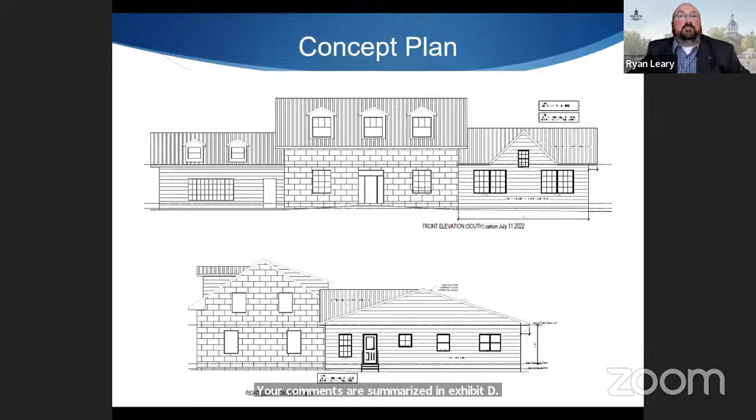This was also circulated to committee members. Your comments are summarized and attached in Exhibit D, and our analysis included a response to those committee members. Mr. Chair, next slide will be our recommendation, which includes a number of conditions, and I believe there's also a second slide with additional conditions. We're available for questions.

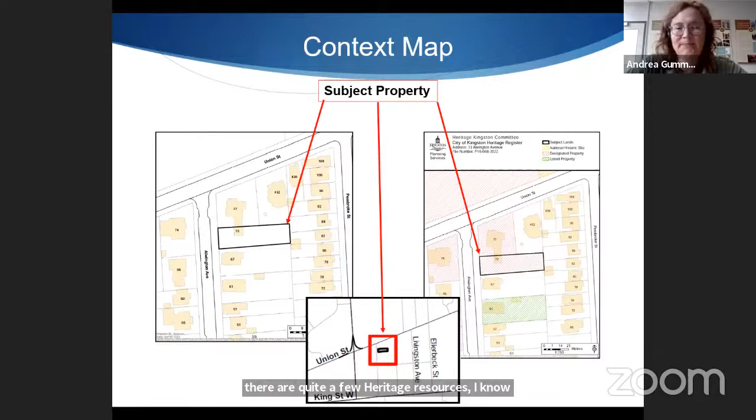So associated with the severance that happened in 2010, there was a need to update the understanding of the cultural heritage value of these properties. And so that was done. And essentially what it says is that the value remains essentially the same, but it has been somewhat lessened because the primary value of this coach house is its association with the principal dwelling at 77 Alwington. So by severing those two properties, that link is also somewhat severed.

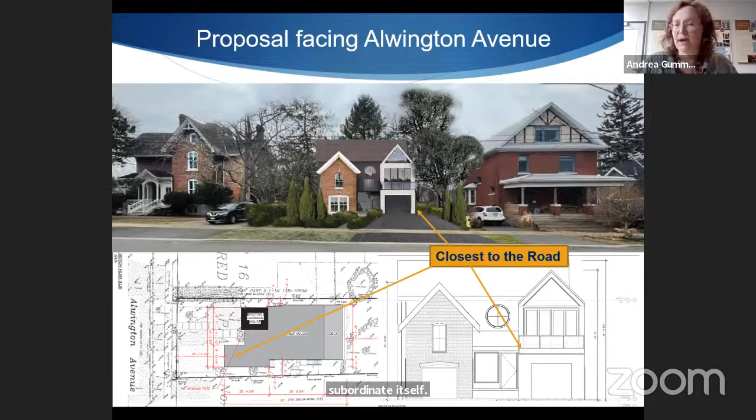Next slide, please. This shows all elevations of the proposal. I think this really helps to see how the garage portion is coming out a little bit. You can also see how the entryway portion between the coach house and the proposed new garage is recessed slightly, which is beneficial to help maintain the form of that coach house.

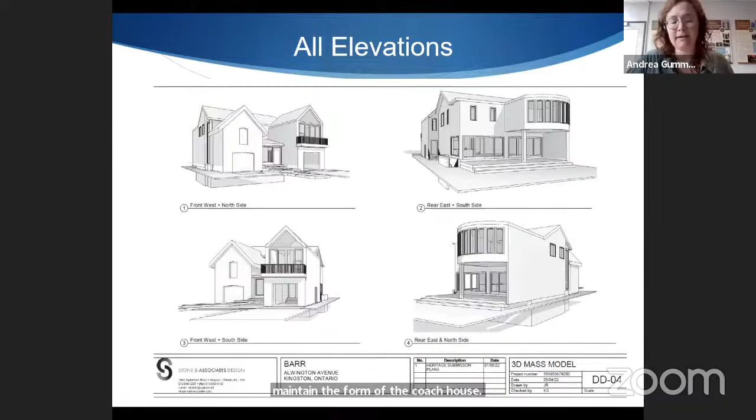Okay, next slide please. We have quite a few—here's our recommendation. We are recommending that this proposal be approved. Part of the proposal, of course, is rehabilitating the existing coach house.

Next slide, please. There are quite a few conditions here, 10 conditions. These conditions ensure that all of the heritage considerations are subject to a little bit of additional analysis by staff as they come in for further refinement of the proposal, but they do allow flexibility for the applicant to build what has been proposed. Essentially, our recommendations have acknowledged that we believe this proposal could be improved by making some adjustments, and these recommendations or conditions would also allow some of those adjustments to be made, but they also confirm that what has been proposed is acceptable. And that is the end of my presentation.

I'm happy to answer any questions. Thank you. Good, thank you very much, Andrea. So committee members, comments, questions? Don Taylor.

I think this is a rather challenging application, and I guess I'm also surprised that there's really overwhelming comments from members, from heritage planners, and from every set of heritage guidelines you can find, that the new garage wing should not be forward of the heritage building. To me, that's such a fundamental thing that I have serious problems with this application. My first question is, why did staff recommend approval against the comments of all the committee members and against the comments of the heritage planners and against the guidelines for heritage renovations?

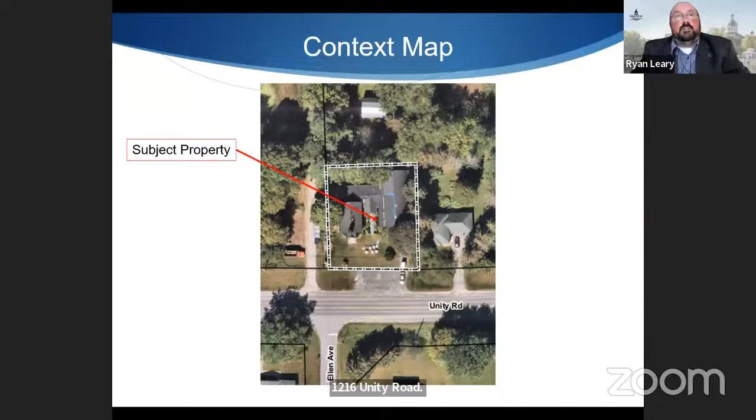So this property is at 1216 Unity Road. This is on the north side of Unity Road, east of Glen Burnie, in the rural part of Kingston.

The property is known as the former Glen Burnie Methodist Church. It contains an 1857 limestone former church building with a 1957 Sorensen-designed modernist addition, connected by a single-story link addition. The property was designated in 2020 under Part 4 of the Heritage Act. Relevant attributes include the one-story rectangular church structure, constructed of rough-faced limestone with a medium-pitch gable roof with simple brackets, and the modern rectangular structure with an arched roof located east of the church, built in 1957.

The single-story rear addition and link structure, which is the subject of the application today, sits primarily between the stone church and the modern structure and is not noted as a heritage attribute. The bylaw is included in your agenda package.

What we're looking at today is an application under Section 33 of the Act to request approval to alter a number of the existing exterior door and window openings on the link addition. This is the south elevation, which faces the road.

It contains a single steel door with narrow side lights flanked by large double casement windows and one smaller single casement window. It's proposed to have a large central four-panel glazing sliding door or French doors, flanked by reinstallation of the existing double casement windows.

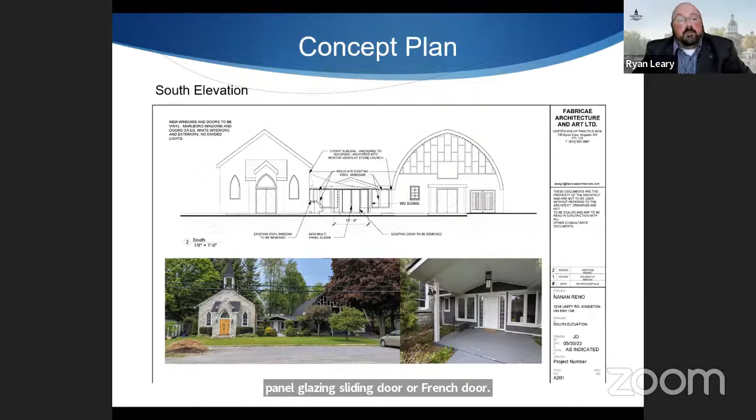The west wall, which we're looking at here, is the west elevation, tucked in behind the stone church, as you can see in the bottom right.

It currently contains a two-panel sliding door and a single sash window. The proposal is for a sliding patio door to be reinstalled in a new, more central opening, with the existing window on the right to remain. A second window is proposed on the opposite side of the door, which will be a horizontal sliding window.

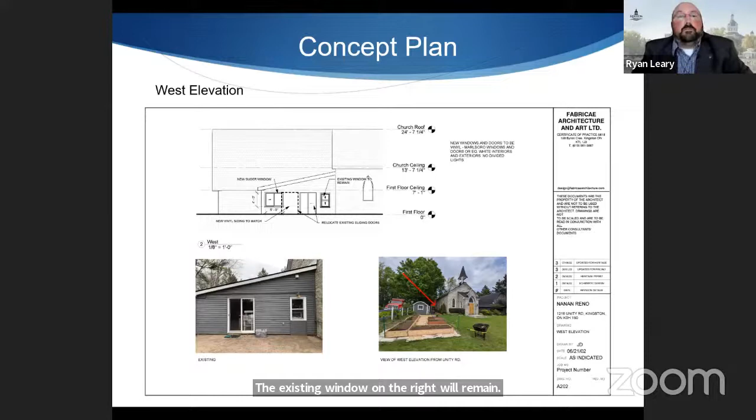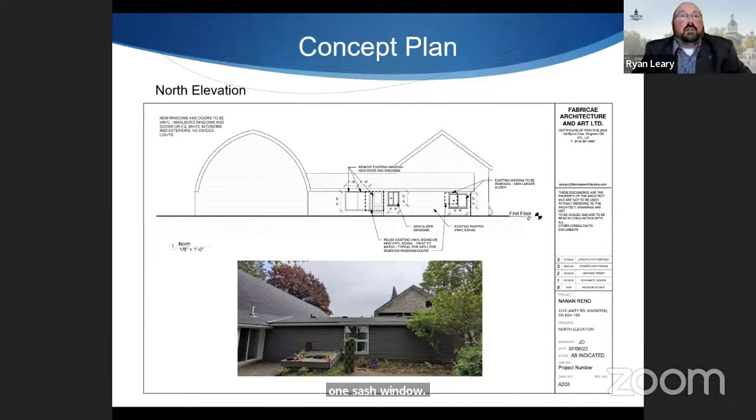This is the north elevation, the back of the building, which currently contains one three-part window and one sash window. A new central partially glazed door is proposed with two horizontal sliding windows on one side and a double fixed window on the other side.

This is a view from above, a floor plan, sort of site plan drawing. The owners wish to finally install anchors for a seasonal sun sail, a canvas covering.

It's going to be a gray-beige color, to be installed above the southern courtyard, the one in the middle of the screen on the south face of the building looking at Unity Road.

The deck and patio is to be improved, making the deck approximately 1 meter wider and 3.5 meters longer than the existing covered porch currently. The covered portion of the porch is not to be changed. The detailed plans were prepared by Jennifer Demeter for Fabricae Architecture and Art Limited, with a cover letter and photographs prepared by the owners, all attached in their application.

In terms of our review, the subject application includes a series of alterations to this later one-story link and rear additions located between the stone church building and the modernist church hall addition, which are attributes of the property. The link addition was built sometime in the mid to late 20th century and is not noted as an attribute. However, alterations to these types of features could have a negative impact on the overall character and attributes of the property.

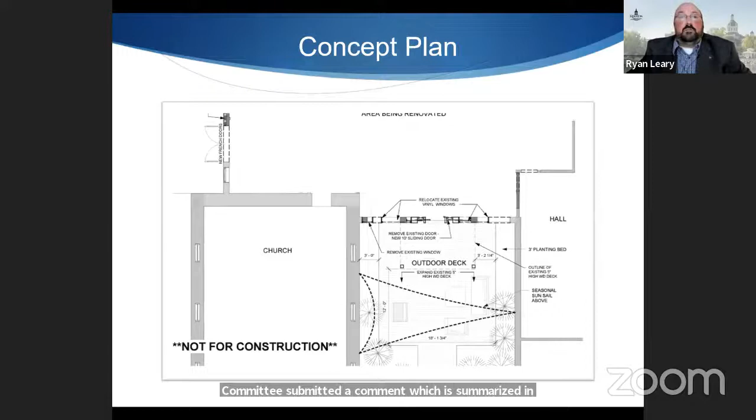So this application was circulated. Building noted that a permit is required, and that separate review will be underway for a lot of the interior renovations that go along with these exterior changes. Committees submitted their comments, which we've summarized in Exhibit D of this agenda, and no significant comments were expressed by committee members.

So our last slide should be the recommendation, and I believe that's the entire motion in front of you, Mr. Chair, and we're available for comments, questions. Thanks. Thank you very much.

I finally worked out what you mean by 3 entrances to the church. It suddenly dawned on me that you count that. Okay, committee, questions, comments, thoughts?

Aha, we've worn you out. Am I right in seeing nobody at all? Tell me if I am wrong. Members of the public, including Jennifer, any comments? And again, seeing none, I believe, Madam Clerk, are we still without members of the public? That is correct, Mr. Chair. Yeah, who you see on your screen is in the meeting. Okay, thank you.

So go on to a motion. Do we have somebody willing to move the printed motion, which is 1 paragraph long with 5 conditions? Looking for a mover, and I see Jane McFarlane. Looking for a seconder, and I see Don Taylor. Further discussion on the motion as printed? Seeing none then. Oh, sorry, Don Taylor.

I think this is quite acceptable. The proposed changes really have no impact at all on the heritage attributes of this property, and so I think that's fine. Normally, we don't feel very good about vinyl products, but these are alterations to a building that is part of the structure that is mostly vinyl, and so one might as well carry on with that. So I don't think the committee should have any problems with this. I certainly don't. Thank you.

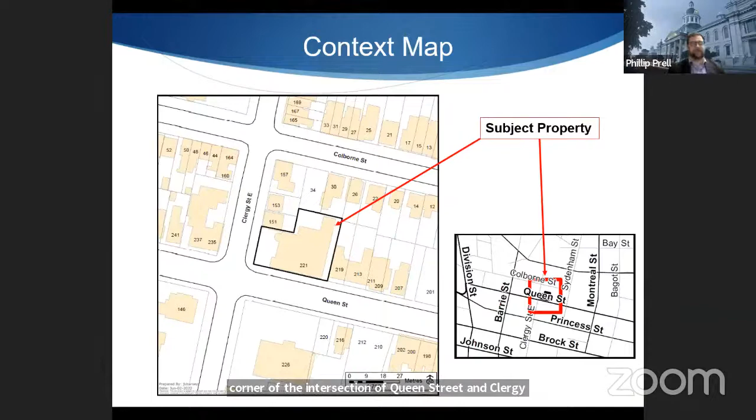221 Queen Street is located on the northeastern corner of the intersection of Queen and Clergy Street East and is kitty corner to St. Andrew's Presbyterian Church, as you can see in the pictures above. Next slide, please. The property is a 3-story limestone Gothic style church with a 5-story bell tower. At this point, I wanted to note that the applicant or the business owner in this case has already installed both signs. Next slide, please.

The property is designated under Part 5 of the Ontario Heritage Act and has the following entry: This 1920 church replaced an 1886 building destroyed by fire. This pyramid roof tower at the corner, large Gothic window to the south, and series of Gothic arches to the west are important features of this limestone church.

Next slide, please. So first I will review the signage at the intersection, but the following comments will also apply to the sign facing Colborne Street, which will be covered in the next slide. This building has maintained its historic exterior throughout a couple changes and internal use changes, and this proposal intends to continue this trend while increasing the visibility and legibility of a new hotel/apartment use.

The increased visibility of both secondary entrances, along Queen Street and on Colborne Street, which you'll see in a moment, resulting from the new signage, should not negatively impact the prominence of the main entrance that faces Clergy Street East, as that entrance has a...

Very prominent staircase, decorative fenestration, and a grand wooden door, or pair of doors. The new signage is required to have been anchored to the building in accordance with the city's masonry policy for reversibility and preservation purposes. This is a condition of approval. Further, the size and design of these signs are appropriate for the building and subtly support users' wayfinding.

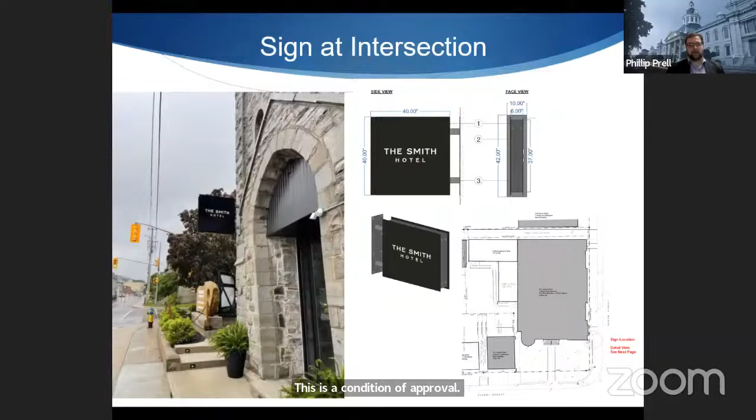Similar to the signage facing the intersection, this sign facing Colborne Street should not negatively impact the prominence of the main entrance that faces Clergy Street, while increasing the legibility of the commercial use. This sign should also have followed the city's masonry policy.

So here is the recommendation for the 2 signs. The one on the intersection will be larger than the one on Colborne Street, which makes sense because that one on the intersection is more of the main entrance.

And these are the recommendations. I wanted to highlight that the masonry policy should have been followed when attaching the signs and is a condition of approval. Thank you very much, everyone.

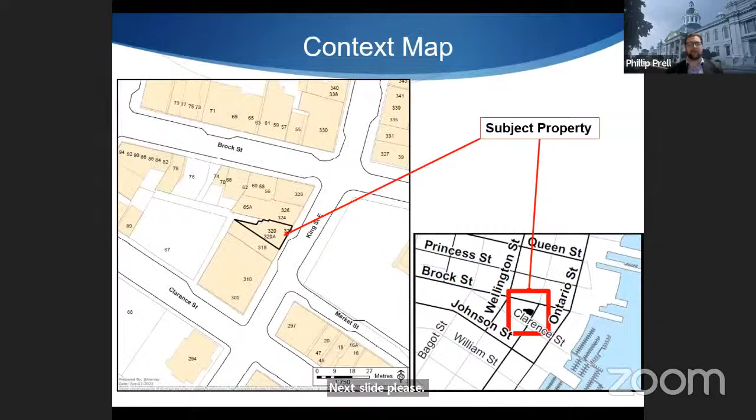320 King Street East is part of the Masonic buildings and is located mid-block between Brock and Clarence Street along the western boundary of the Market Square Heritage Conservation District, as you can see in the pictures above. Next slide please. 320 King Street is part of a 3-story Italianate-influenced brick building with arched window openings with buff-colored arches, which is characteristic of John Power. Next slide please.

The property is designated under Part 5 of the Ontario Heritage Act and has the following relevant attributes: the building is divided into 10 equal bays with regularly spaced segmental headed windows and horizontal stone banding, and has arched window openings with buff colored brick arches and quoined edge treatment - my apologies for that word. Next slide please.

As we can see here in the picture, the original sign area, shown in the picture to the right, is actually going to be moved up a little bit. Instead of being on the springer, it's going to be just above it, anchored in the masonry joint. So the new signage is a neutral, reversible impact that will not detract from the district nor the existing heritage building. The proposed signage is not on the prohibited HCD plan list, does not result in excessive signage, and will not cover any heritage attributes of the building.